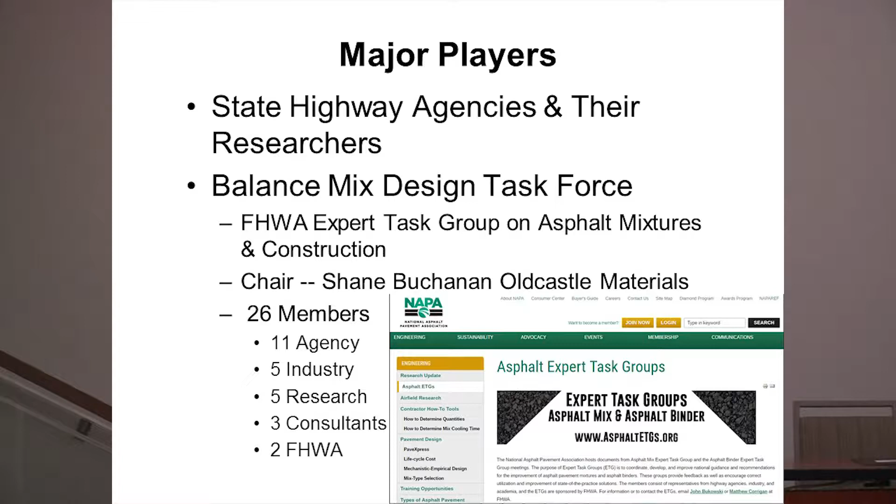One thing I want to say is my company and I haven't done a lot of work in the balanced mix design area. The major players have really been several state highway agencies, pushing this with their local research people at their universities. And within a group I'm actively involved in, the FHWA Expert Task Group on Mixtures and Construction, we put together a balanced mix design task force.

It's quite a large and active task force, chaired by Shane Buchanan from Oldcastle Materials. There are about 26 members of the task group, and as you can see it's dominated by agency personnel, with about 11 agency members, five industry members, five research members, a few consultants, and the FHWA.

Really the goal of the Balanced Mix Design Task Force is to try to provide some type of leadership in this area of balanced mix design. Information that comes out of the expert task groups is available on NAPA's website at that web address.

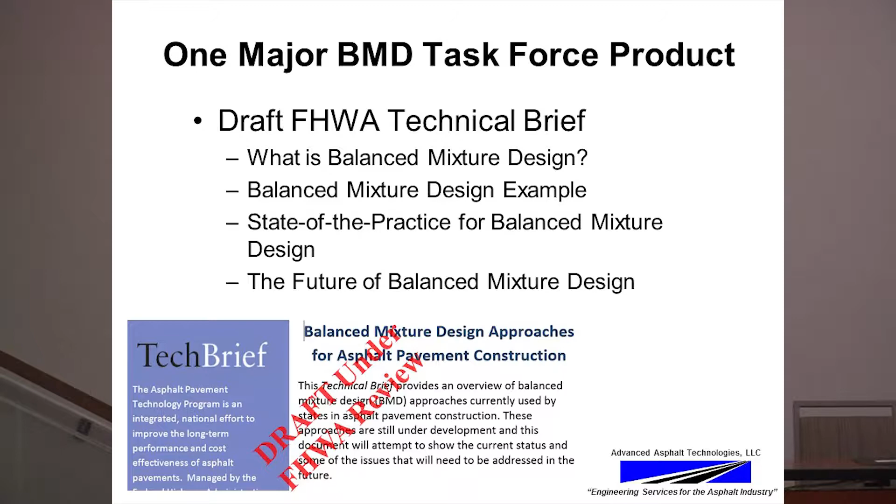One of the major products that has come out of the Balanced Mix Design Task Force is an FHWA technical brief on balanced mix design. This brief has been put together and is currently under review by the FHWA. Hopefully we'll see it published shortly, and this presentation pretty much follows what's in the technical brief.

The major elements of the technical brief are a section on what balanced mixture design is, a balanced mix design example, some information on states currently doing balanced mix design work, and then some ideas of future work in this area.

So the outline for today follows that. What is balanced mix design? Then, why has it become so popular today? I think that's an important thing to go over. Then I'll talk about balanced or performance testing for balanced mix design. You'll see that balanced mix design really is based on principles of running performance tests to check mixtures for rutting and cracking resistance. I'll go over a couple of examples and talk a little about what's going on as we move forward.

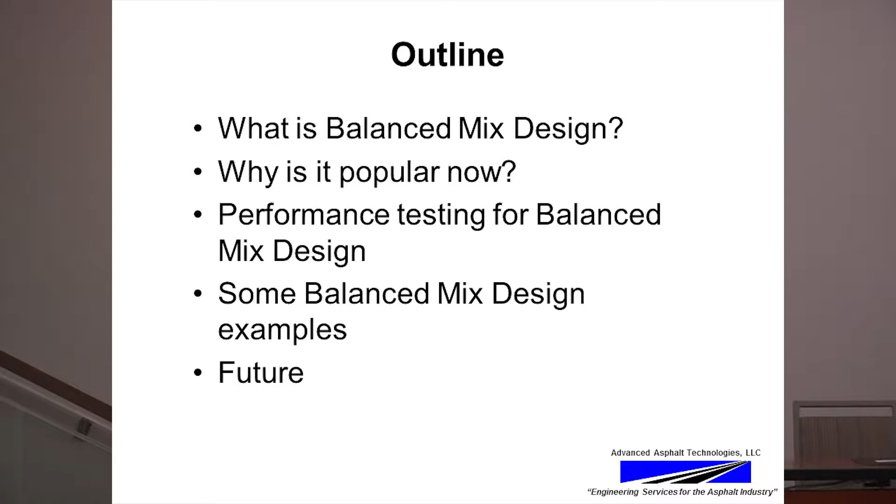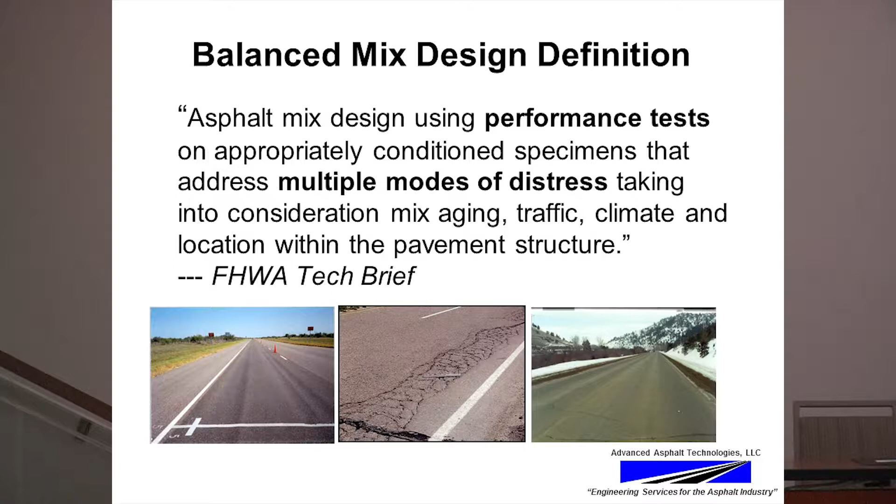So balanced mix design, from the technical brief, is defined as an asphalt mix design that uses performance tests on appropriately conditioned specimens that address multiple modes of distress, taking into consideration aging, traffic, climate, and location in the pavement structure. Really the idea behind balanced mix design is to produce mixtures appropriate for the given conditions.

What you may want in a surface course mixture for rutting and cracking resistance may be significantly different than what you'd want in a base course mixture on a stiff pavement. So the idea is to use performance testing and appropriate criteria to address the various modes of distress you expect to see, where those criteria would be different depending upon the layer in the pavement you're working with—surface, intermediate, base.

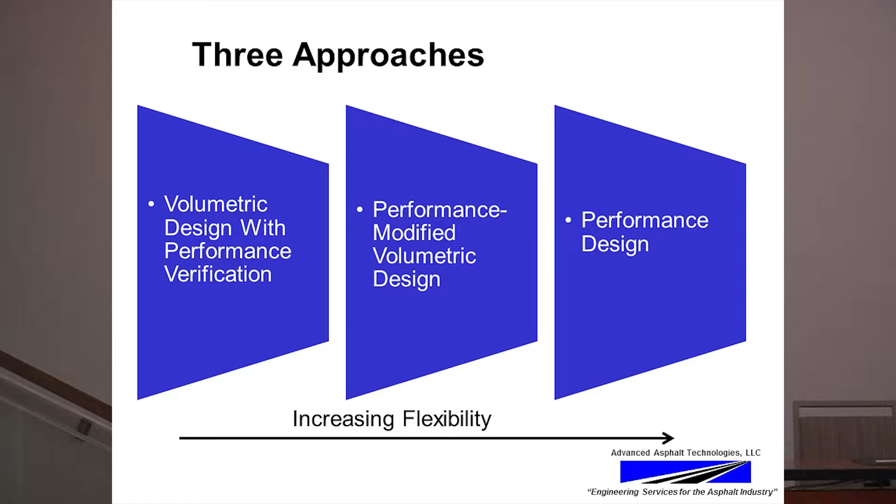There are three approaches that lay out there with respect to producing balanced mix designs. The simplest is to do a volumetric mix design and then run some performance tests at the end. A little more complicated would be a performance-modified volumetric design, where you allow the volumetric criteria to vary based on the performance data. And finally, there's a performance design, where you design the mixture based on the results of the performance testing, and the volumetric properties are what they are.

What you can see across the bottom is, as you move from left to right, there's increasing flexibility for the designer to design the mixture. With a volumetric mix design alone, you're going to meet a series of very specific criteria on the volumetric properties of the mixture. As you add performance testing, there's more flexibility on the materials you can consider and more flexibility on the properties of the mixture you can produce. This is a flow chart that's within the FHWA technical brief.

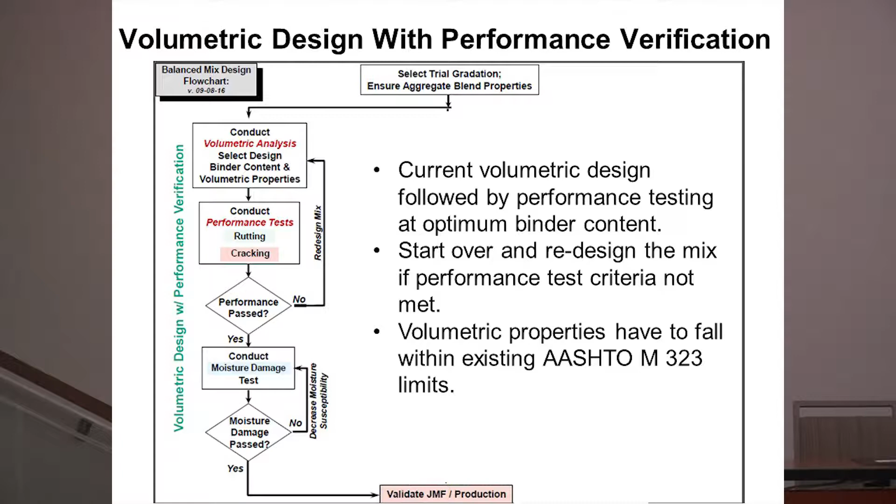This particular one is for the volumetric design with the performance testing. In this approach, you would do the current volumetric design as we do it now in AASHTO M323 and AASHTO R35, and come up with an optimum binder content. Then you would perform the performance testing for cracking and rutting resistance at that optimum binder content.

If it does not pass the criteria given, then you redesign the mix and start over. You would go through another volumetric design, then followed by running the performance tests again. In this case, you have to meet the volumetric criteria as well as the criteria for the performance testing. This actually puts greater limits on what you can do as a mixture designer. You meet the volumetric criteria, you also meet a series of performance criteria.

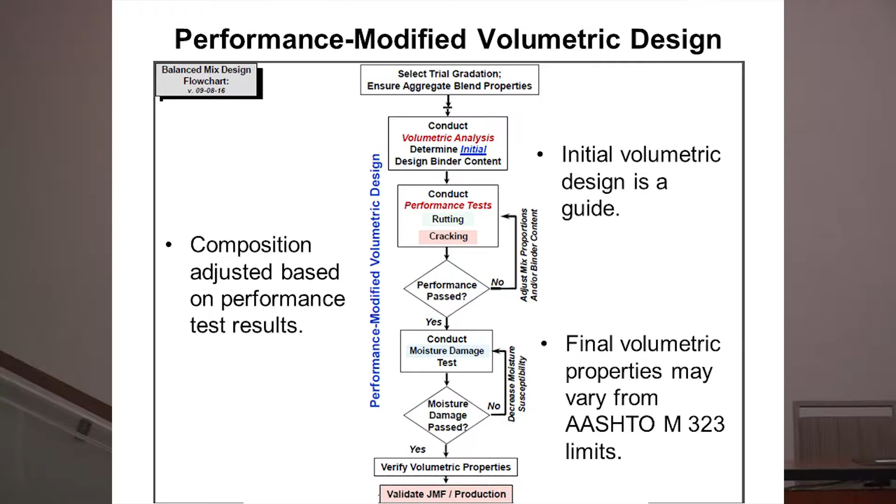With the performance modified volumetric design, the volumetric design is done at the beginning and really serves only as a guide. So what you get is an optimum binder content. You would then conduct performance testing at multiple binder contents around that optimum, and the composition of the mixture that you finally design is adjusted based on the results of those tests. In this case, the volumetric criteria, you don't necessarily have to comply with them. You simply have performance tests that you base your decision on for the binder content or the properties or composition of the mixture. This provides a little bit more flexibility in actually performing the design.

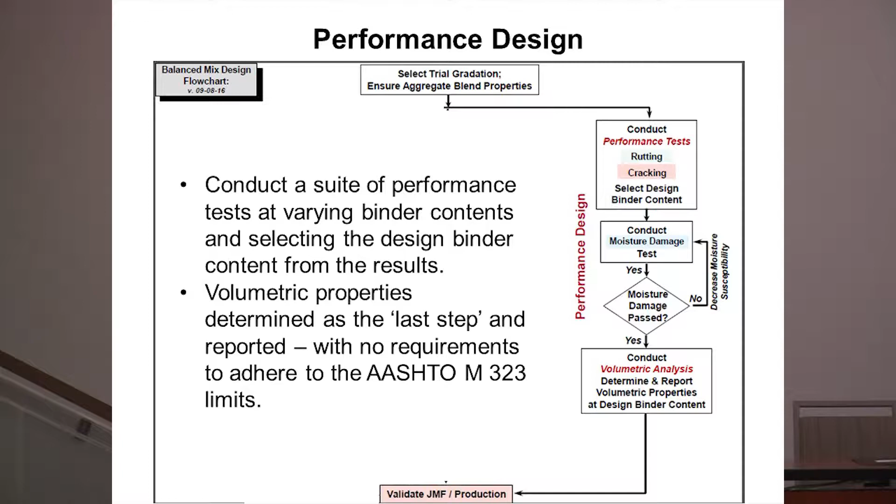In the final one, which is a performance design, you're going to perform the suite of performance tests at various binder contents or various compositions, or different levels of polymer modification or something along these lines. Then based on the results of those tests, you select an optimum composition that you're going to use for paving. In this case, the volumetric properties are really determined as the last step, and again there's no requirement to adhere to the AASHTO volumetric properties at that point. So those are the three approaches that are out there, and various states have attempted each one of these, and I'll go into that in more detail later.

I think one of the big questions we have right now with respect to balanced mix design is that the concept is really fairly good for the laboratory design of the mixture. The big question comes about quality control and acceptance of the mixture. Ideally, what you would want to do is have some type of acceptance plan that is based on the performance testing that you're going to run.

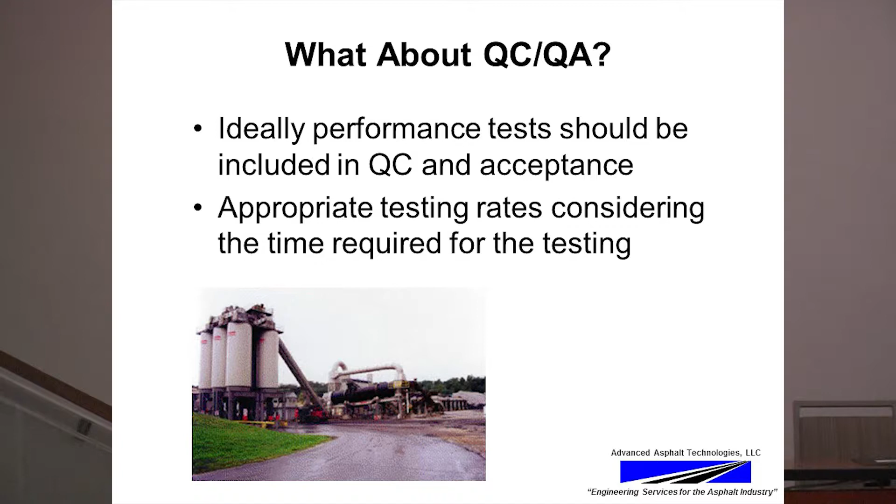The issue is that the testing takes time, particularly if you're going to condition samples to represent long-term aging. You're going to be doing this type of work after the fact, and you're going to have to be doing it at a reduced rate compared to what we currently do in acceptance testing now based on volumetrics. So I think this is a big issue that's driving the types of performance tests that I'll talk about in a little bit.

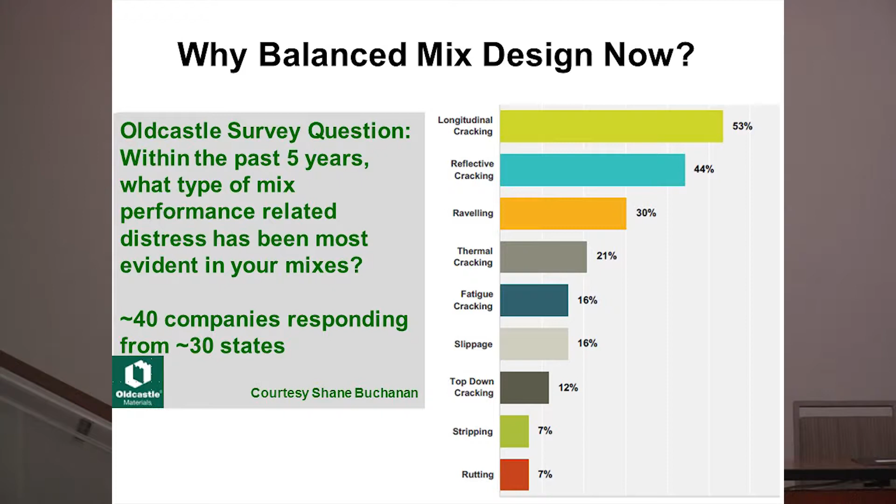The next area I want to discuss is why balanced mix design now. I took this slide from Shane Buchanan. This was a survey that Shane sent out to companies within the Oldcastle organization. There were about 40 companies that responded, in 30 states. I think what we see here pretty much represents what a lot of agencies are experiencing right now.

The issue that seems to have risen to the top at this point in time are issues associated with the cracking resistance of our mixtures. If you look at the responses, rutting and moisture damage are down at the bottom, where only 7% of the companies responding said this was an issue, a type of distress they were seeing. But what you see at the top are things such as cracking, various forms of cracking, and raveling. I think this is what's driving us toward using balanced mix design, and what has driven agencies toward using it.

Some of the things we've been seeing over time, I think within the Superpave design system, the AASHTO M323, is mixtures that have lower binder contents, a tendency to have lower binder contents than what we've seen with, let's say, Marshall mix designs in the past. This lower binder content, the lower volume of effective binder in a mixture, tends to produce mixtures that are more susceptible to cracking and durability problems.

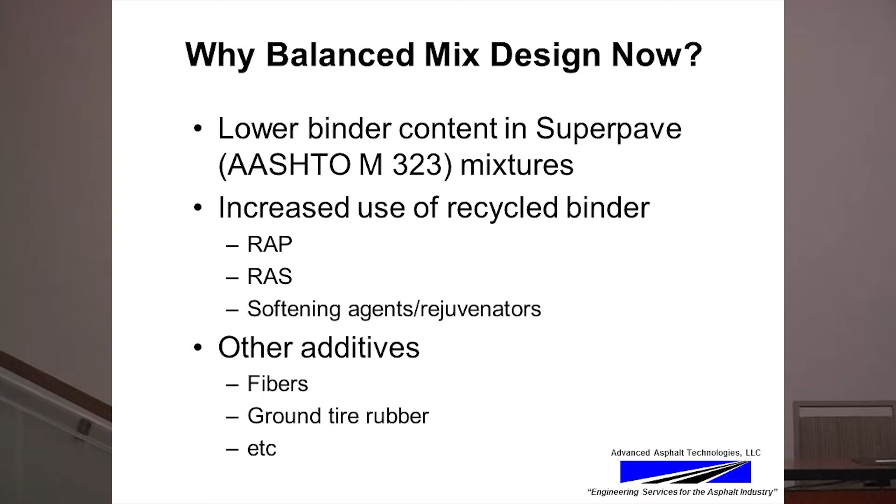There's also been an increase in the use of recycled binder. Lots of recycled materials are being used, recycled asphalt pavement, recycled asphalt shingles. These are sometimes used in combination with rejuvenators and softening agents. These types of mixtures, you really cannot assess their performance based on binder properties and volumetric properties alone.

So there's been a drive toward having performance testing to mitigate issues associated with cracking. There are other types of additives being added to mixtures: fibers, ground tire rubber, and many others that you cannot assess by looking at binder properties and volumetric properties alone. So this is driving us toward having some types of performance testing within our design system.

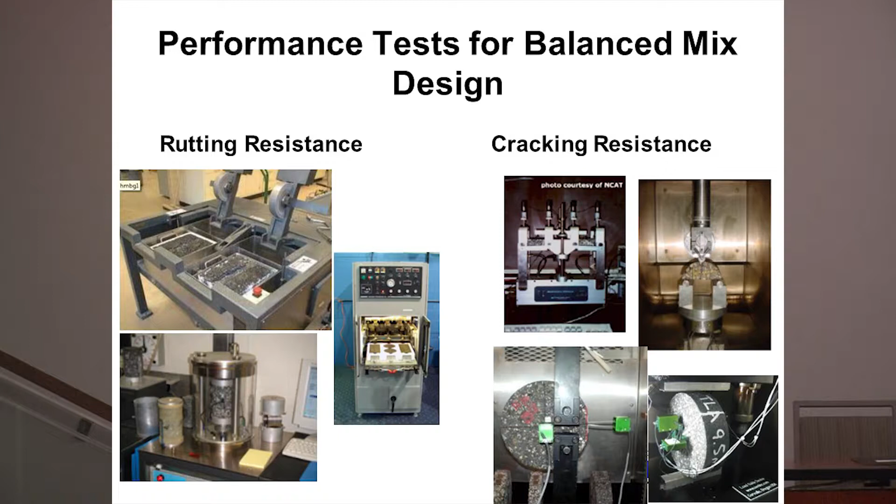So what performance tests are out there and what has been used in balanced mix design? There are basically two types of performance tests that are used. One set of testing is done for rutting resistance, a second set is done for cracking resistance, and I'll go through what is the state of the performance testing arena at this point in time.

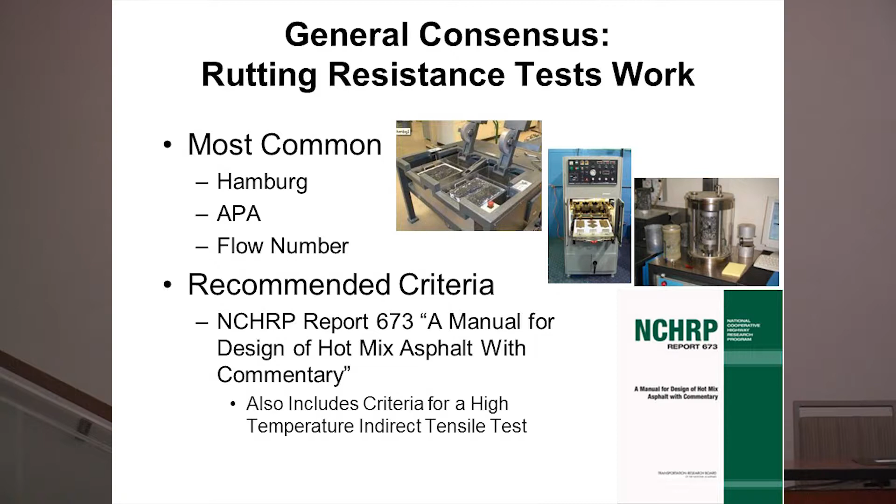I think there's general consensus within our industry that rutting resistance tests work, and it really doesn't matter what rutting resistance test you use. I think we're convinced that the rutting problems we see in pavements are fairly easy to take care of. The most common tests we see with the balanced mix design concepts are the Hamburg and the APA, the wheel load type testers, followed by the flow number test. I've got photographs of these various tests up there.

There are some recommended criteria in an NCHRP report done on mix design, report 673. These are a collection of criteria developed in various states using these rutting performance tests. Interestingly, that report also includes criteria for a very simple high temperature test, an indirect tensile test put together by Don Christensen, who works for our company, for PennDOT at one time.

That criteria is in there, and the reason I bring it up is that we're trying to simplify as much as we can this testing, with the idea that potentially something of that nature could be used very simply in quality control and acceptance after you make the specimens that you do for normal volumetric acceptance. You'll see that concept coming about in some of the cracking tests now.

With respect to the cracking tests, unfortunately what I can report is that there really is no consensus on a cracking test. I think there's a couple of reasons. One is the cracking mechanisms that occur in pavements are much more complex compared to the rutting problem we have. You've got different modes of cracking: bottom-up fatigue cracking, top-down cracking, reflective cracking, thermal cracking.

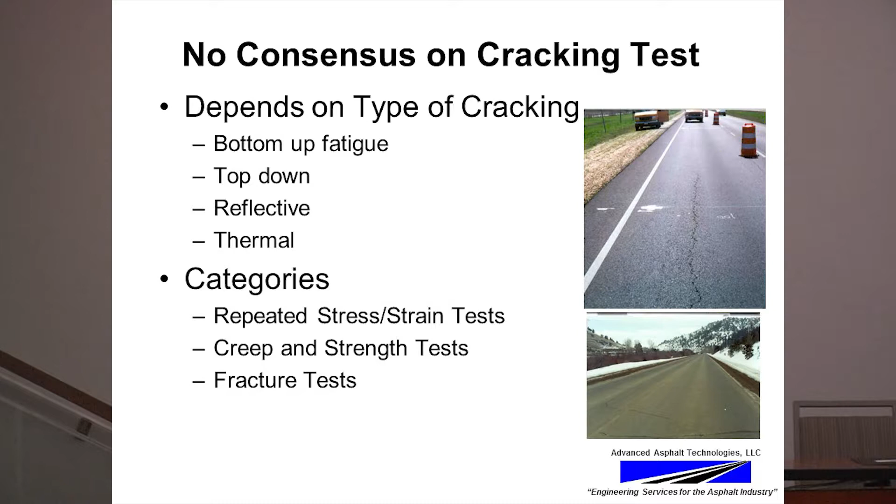What I'll do is try to go through some of these cracking tests based on a couple of categories, and I put them into 3 categories here. Some of the tests use repeated stresses or strains, some are creep or strength tests, and recently what we've seen a lot of is fracture tests. The reason is that the fracture tests are relatively simple to conduct compared to the others.

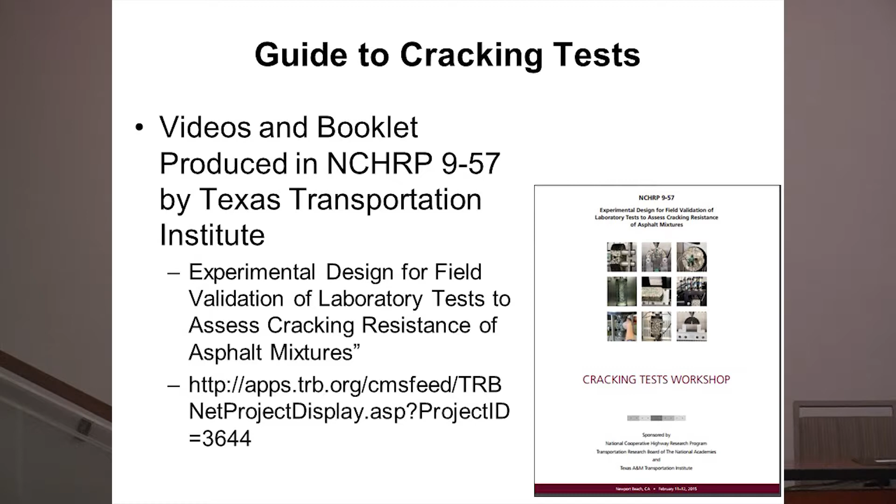There's a very good guide to cracking tests put together as part of NCHRP Project 9-57, done at the Texas Transportation Institute. There's a booklet that describes every one of these tests in fairly simple terms, giving information on what equipment is needed, the cost, and the complexity of the test. There's also a series of videos put together by Texas A&M for each of these tests showing specimen fabrication and testing, with a link at the bottom to that project's results. Some of the information here comes directly from this guide.

With respect to the repeated stress and repeated strain tests, the device on the left, the flexural fatigue test, is the one that has been around the longest. This is work done by Professor Monismith starting back in the 1960s. You have a beam specimen that you repeatedly flex, and you count the number of cycles to failure. From that, you can generate a strain versus number of cycles to failure curve. It's a very difficult specimen geometry to produce, very time-consuming testing, so it's not run very often.

The one in the middle is the Texas overlay test that a number of agencies have begun to use. You basically glue a specimen between 2 plates with a crack in between them.

You move one of the specimens relative to the other, or one of the plates relative to the other end, and you propagate a crack through the specimen as shown there. You can do it in a horizontal mode, or vertically in some of the servo hydraulic machines. But again, what you're looking at is the number of cycles to failure.

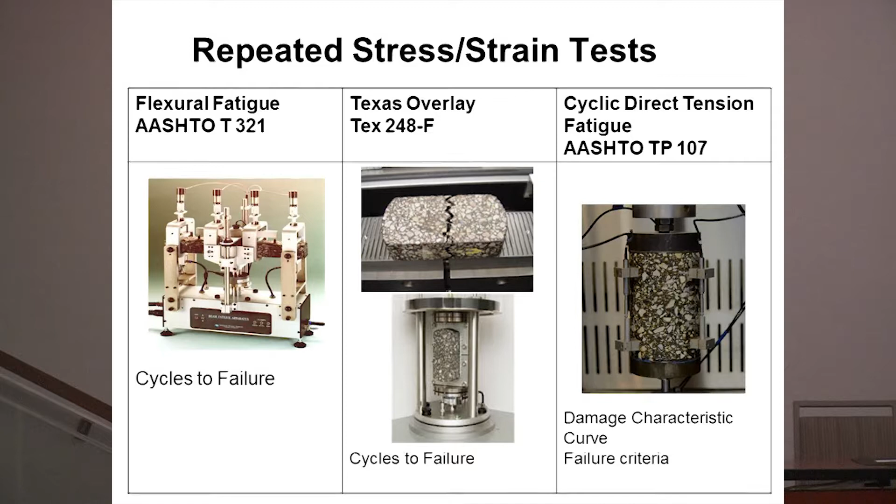What is done here is you get a characteristic curve. All of the materials or asphalt mixtures tend to damage in a certain way. You also get a failure criteria from it, and it's another type of repeated loading test.

There's a series of creep and strength tests. The low temperature indirect tensile test and the energy ratio test both use the indirect tensile geometry with instrumentation applied to it. What you measure for low temperatures is creep compliance and tensile strength, and you put that data into a thermoviscoelastic analysis to predict cracking.

Quite time consuming to do the low temperature indirect tensile test. The energy ratio test is the only one that I know of that is specifically related to top-down cracking.

In this case, same geometry. Here you measure modulus, compliance of the material, and strength, and calculate an energy ratio, which is basically the resistance of the mix to cracking divided by the potential for the pavement to crack. It's a fairly simple calculation that is done.

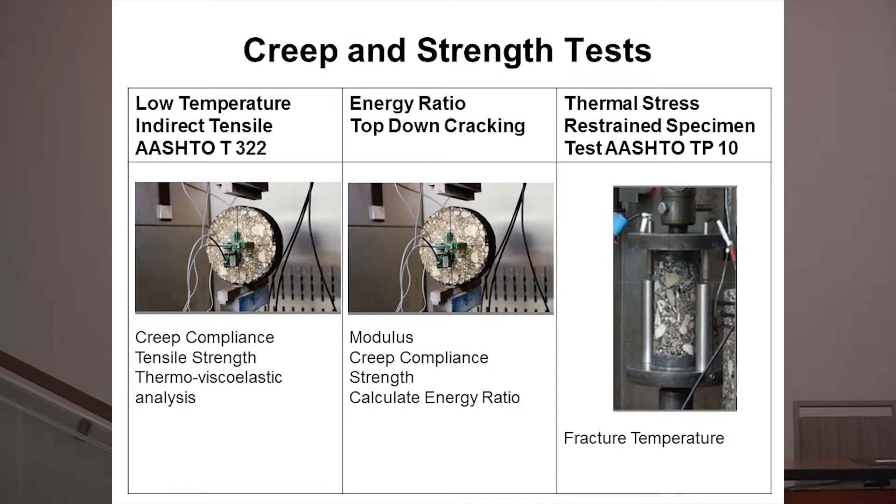Then there's the thermal stress restrained specimen test. You put a specimen between a couple of plates, drop the temperature, and wait for it to crack. Since it doesn't move, the thermal contraction is going to build up stresses, and the parameter you get out of it is a fracture temperature.

As you can see, these things all involve a substantial amount of instrumentation, and so do these low temperature disc shape or low temperature fracture tests. There are two low temperature fracture tests that are used: the disc shape compact tension test, which has an ASTM standard for both of these, and then the other one is the semicircular bending test.

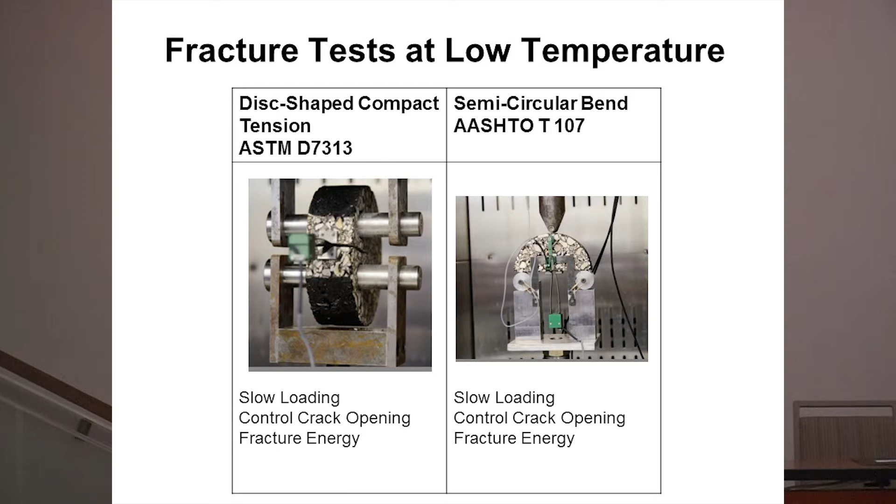So you take a specimen, cut it in half, and put a notch. You have a notch in the disc shape compact tension test, and what you're doing is looking at the energy required to propagate the crack through the material. These are done at relatively slow loading rates, and you have to control the rate that the crack is opening.

Finally, there's a series of fracture tests at intermediate temperature where a lot of the instrumentation I've shown you in the previous ones is removed.

There is a semicircular bending test developed at Louisiana State, or the Louisiana Transportation Research Institute, that uses multiple notches, a slow loading rate, and what you get is a critical strain energy release rate, which is the parameter that comes out of that analysis.

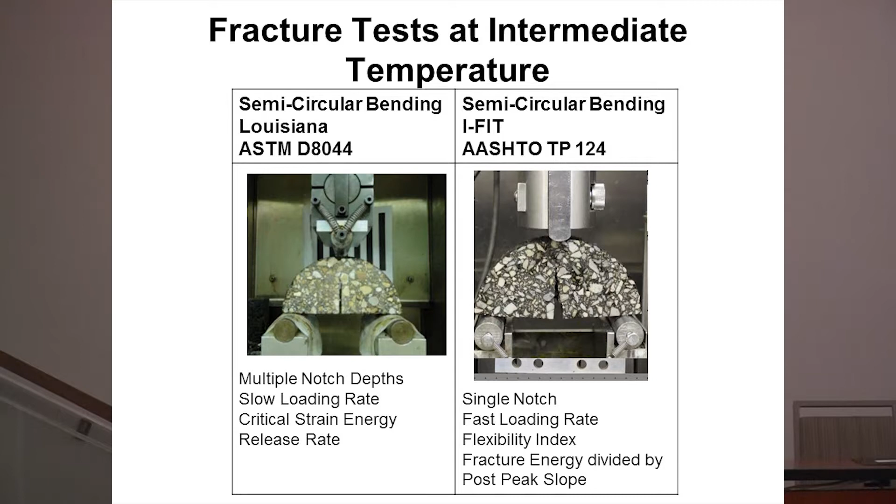There's also one put together at the University of Illinois, the IFIT procedure, which is AASHTO TP 124. It uses one notch depth, fast loading rates, and you calculate what's called a flexibility index, which is the area under the stress strain curve or the load displacement curve divided by the slope of the post-peak part of it. The idea behind both of these tests is to have relatively simple fracture tests that you can do at intermediate temperatures to get an idea of the fracture resistance of the mixtures.

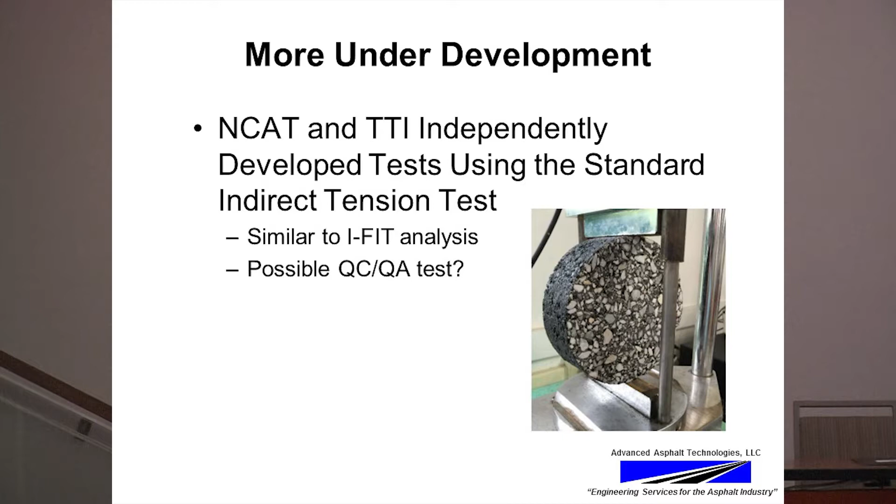And just when you thought all of the fracture tests were done, there are a couple more under development. This was interesting in some recent work done by NCAT and TTI, the Texas Transportation Institute. Independently, they've developed tests using the standard indirect tensile test to look at fracture resistance.

The reason I bring this up is, like I said with the rutting tests, if you can use this IDT geometry, it's a fairly simple thing. We make these specimens every day at the plant, and these things can be used in testing.

So for cracking, what I can tell you is that research trying to determine the best type of cracking test to use in balanced mix design is continuing. There's a second phase of NCHRP 9-57 that's been approved, where some of these tests are going to go through ruggedness testing and then correlations to performance.

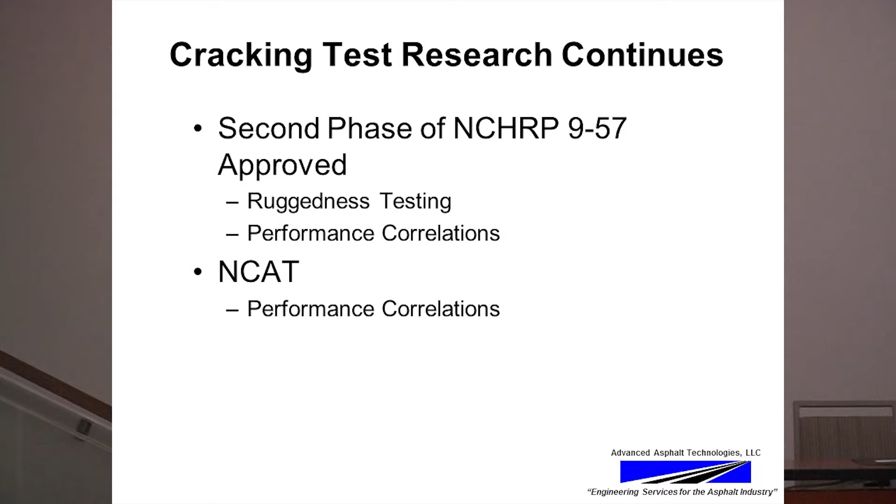And NCAT has been doing a number of correlations to performance using materials from their test track and from the MnROAD project. So what I'll do now is quickly go through a couple of examples of the volumetric design or balanced mix design. The first one I've got up here is the volumetric design with performance testing.

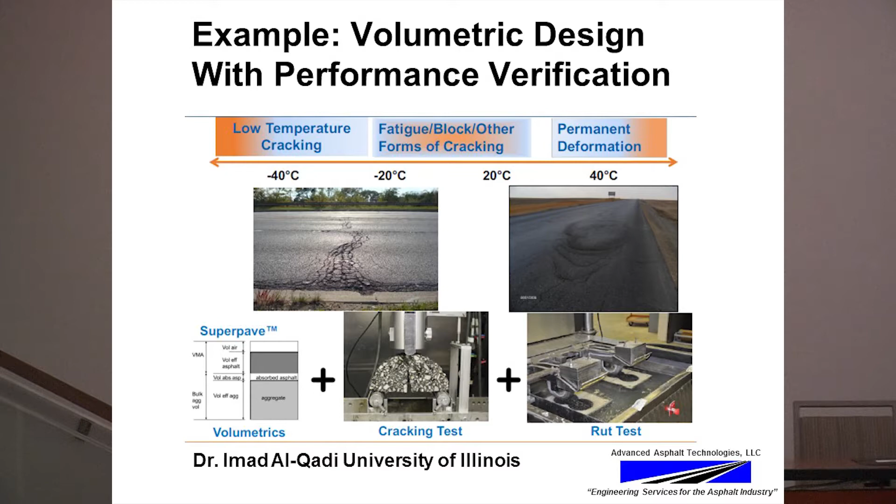This is the approach being taken in Illinois. At the bottom you have the volumetric properties, so you design the mix using current volumetric analysis. Then you run two tests: the Illinois semicircular bend test, or IFIT, to look at cracking resistance, and the Hamburg wheel tracking test for rutting resistance. Illinois is in the process of putting together criteria for those two tests for their conditions. This work was done at the University of Illinois by Professor Al-Qadi.

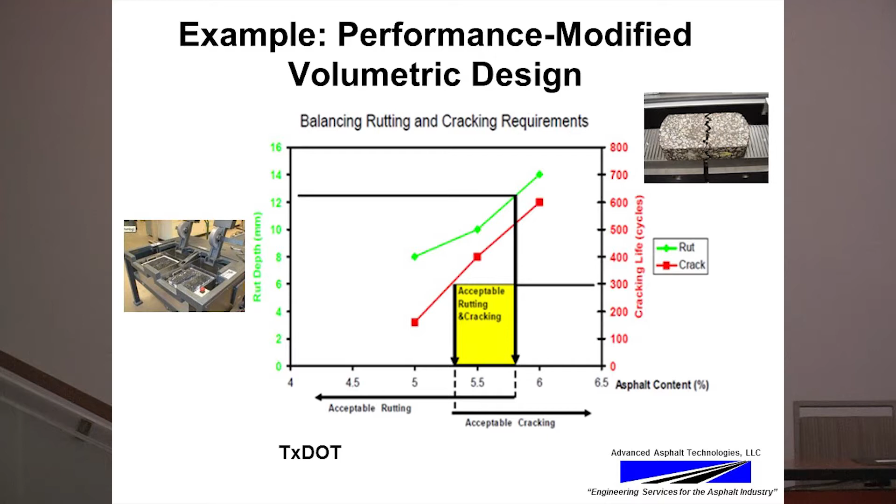A second example is how you would do the performance modified volumetric design, using information from TxDOT. They use the Hamburg wheel tracking device for rutting resistance, and for cracking resistance they use the overlay tester. If you look at the green curve, they do a volumetric design at the optimum asphalt content plus and minus 0.5%, then run the performance tests.

They have a criteria of 12 millimeters for rutting resistance, which gives you an asphalt content you have to be below to meet that requirement. With the Texas overlay test for cracking, there's a limit of 300 cycles to failure for acceptable cracking resistance. This gives you a window in which you can select the final binder content of the mixture. This is the concept put together in Texas, called performance modified volumetric design, because the mixture may in the end not meet all the volumetric requirements within that window.

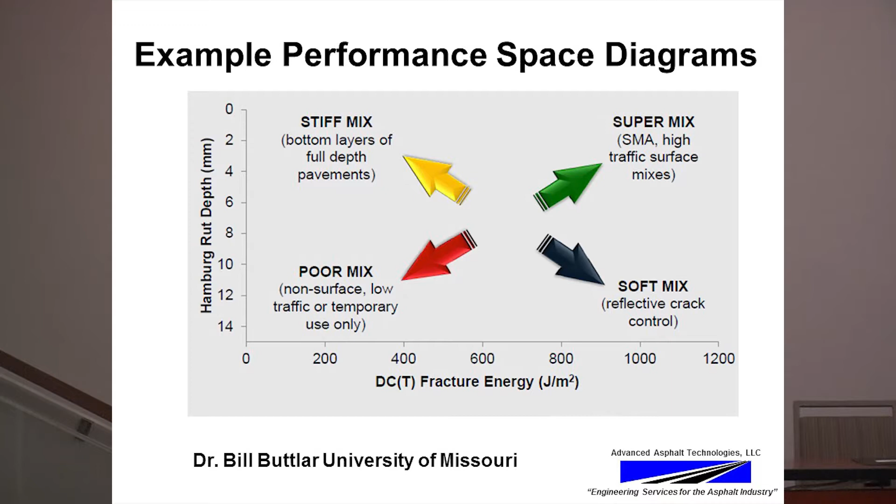Another very interesting idea put forward by Bill Buttlar from the University of Missouri is using performance space diagrams. He creates a diagram with rutting resistance on the vertical axis and cracking resistance on the horizontal axis. Increased rutting goes down in this case, but you can have zones within there representing various types of mixtures. The upper right-hand corner represents very rut-resistant, highly flexible, fracture-resistant mixtures, like SMA and various surface course mixtures.

The one at the bottom right is a soft mix, not very resistant to rutting but highly fracture resistant, so maybe use that in a reflective cracking situation. The upper left is stiff mixtures, which you might use in base courses or intermediate courses. The bottom left-hand corner is probably the area to stay away from, where you have high rutting and high potential for fracture. I think this is a very interesting concept for designers to look at what space they want to be in based on what mix they're designing and where.

Now looking a bit more to the future: more and more agencies are getting involved in the balanced mix design area. I'd say California, Texas, New Jersey, Louisiana, and Illinois have been the pioneers pushing this effort. More recently, other agencies, at least based on information I've had or people I've talked to, have ongoing work in the area of balanced mix design. So I think we'll see more and more agencies become interested in this.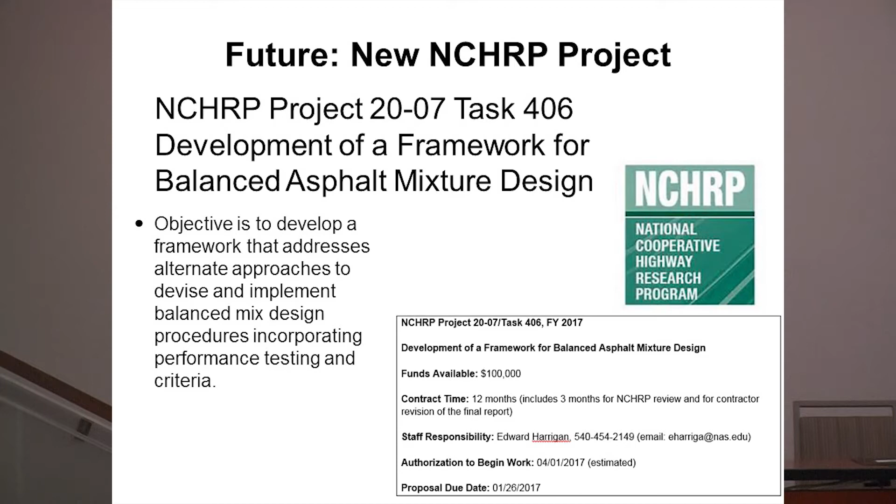There is an NCHRP project that has recently been advertised. Proposals have been received and I think a contractor has been selected, though I'm not sure who that is, on developing a framework for balanced mix design. This was a problem statement put together by the Balanced Mix Design Task Force, and the objective is to put together a framework that'll help additional states get an idea of how they want to enter into this balanced mix design arena.

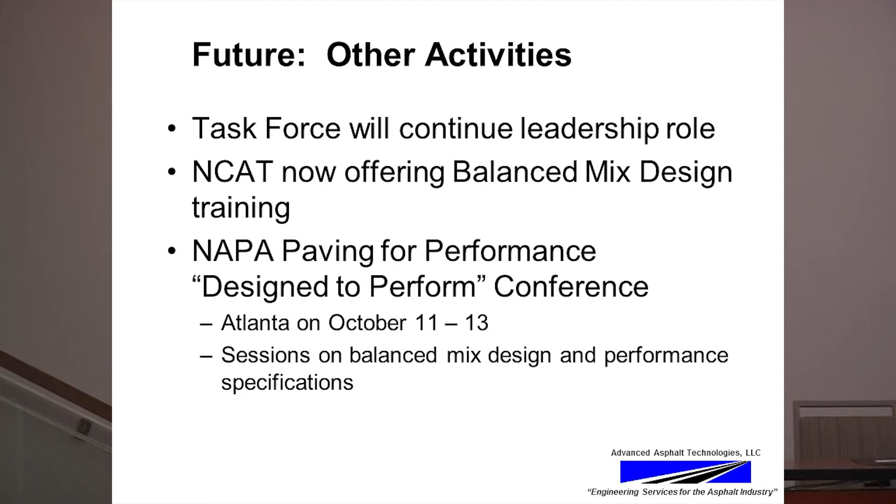Finally, some other activities: the task force is going to continue its leadership role. Shane is quite active with the task force, holding a monthly call with all the members, and there's quite a bit of work they're doing. An interesting thing I just became aware of is that NCAT is now offering balanced mix design training - there was one course in March, and they're continuing to put on courses. Also, NAPA is going to have a conference in Atlanta on paving for performance, designed to perform, with several sessions dealing with balanced mix design and performance specifications.

That's all I have, and if there's time, I'll answer any questions you might have, and we can have discussion.

I know it's probably a difficult question to answer, but do you have any advice for states or agencies that haven't really looked at cracking so far, and are looking at 10 plus test options? Do you think it's going to be better?

No, it's a question we always ask, because we have 10 different cracking tests. Yeah, no, I think it's a very good question. I think the first thing I would consider is, what is the mode of cracking that you're seeing? I would certainly look at a different type of test for thermal cracking versus load-associated cracking.